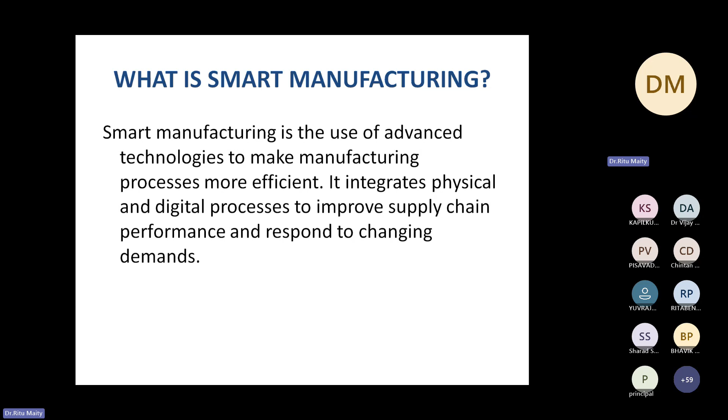So when we look into what smart factories are actually doing and what technologies they are using, AI plays the major role, because artificial intelligence is a technology in which we try to make machines intelligent, and smart factories are the concept in which all the machines are intelligent enough to take decisions by themselves. In smart factories we will have very few human beings; all the machines will be controlled by themselves. So machines are now intelligent, they are able to take decisions.

So obviously for these things to happen, we need technologies like artificial intelligence, machine learning, IoT, cloud computing. All these technologies are coming together to make the smart factory concept work. Previously in manufacturing sectors we focused on subtractive manufacturing processes. We have various machining processes which we are already using, and mostly they were subtractive manufacturing processes.

But in the current era we are seeing additive manufacturing processes, where by adding material layer by layer we are making the product. So various complicated items can be made easily through additive manufacturing. Nowadays in the manufacturing sectors we have the concept of augmented reality and virtual reality, where if an automobile company wants to launch a new model of a car, before launching it they make the model of the car in the software.

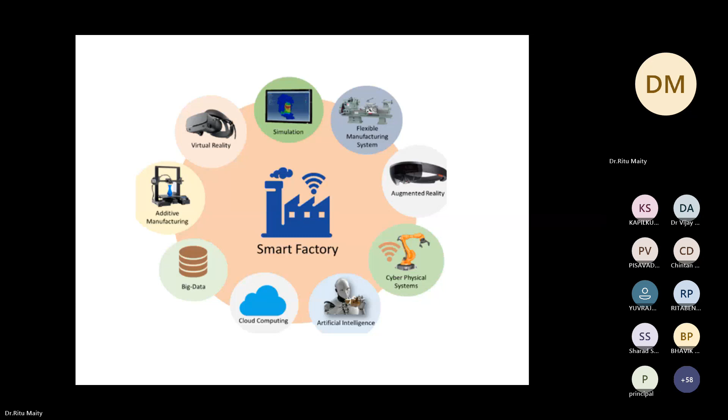So why is smart manufacturing getting a boom in the current era, we can say? It is because it is increasing the businesses like anything. Business can be scalable with the help of the smart manufacturing concept. Mass productions are becoming easier. Customizations are possible, mass customization.

Previously, if someone is looking for a very specific product, like if I say that I need a particular design of car, maybe it won't be possible in the previous system. But now in the current era, people are working on smart industries and smart manufacturing processes, where they are saying that if a person comes for a customized product, a customized car, then also we will be able to manufacture and give it, because the time that was previously taken to make a product has been reduced because of these new technologies that are coming into our industries.

So now, as our topic of discussion is micro machining techniques and how AI and the new technologies are impacting micro machining, I'll be first discussing micro machining, and then we'll move into how AI is affecting micro manufacturing processes.

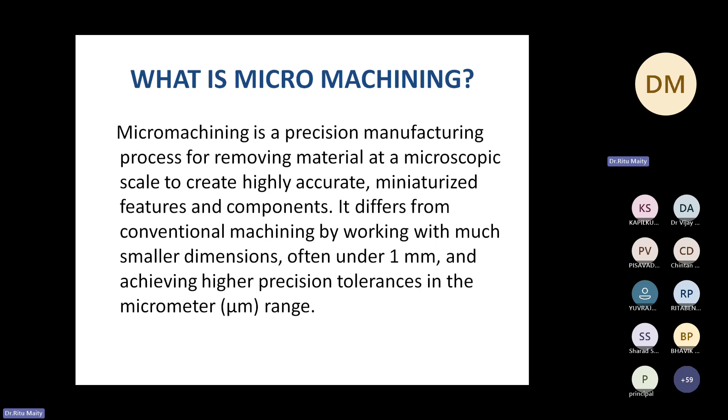So micro machining is basically a precision manufacturing process for removing material at the microscopic level to create highly accurate miniaturized features and components. It differs from conventional machining by working with much smaller dimensions, often under 1 mm, and achieving higher precision tolerances in micrometer ranges. So micro machining is a very critical area where getting the precision is very, very important. So let us see how these technologies are impacting this field.

So if I try to classify micro manufacturing into various domains: under micro manufacturing, we have different MEMS technologies, that is micro electromechanical system technologies, like lithography based methods, photolithography, plating methods, chemical etching methods, LIGA methods, through which we are able to generate micro components which are mostly used for electromechanical parts, and in circuit part design and manufacturing.

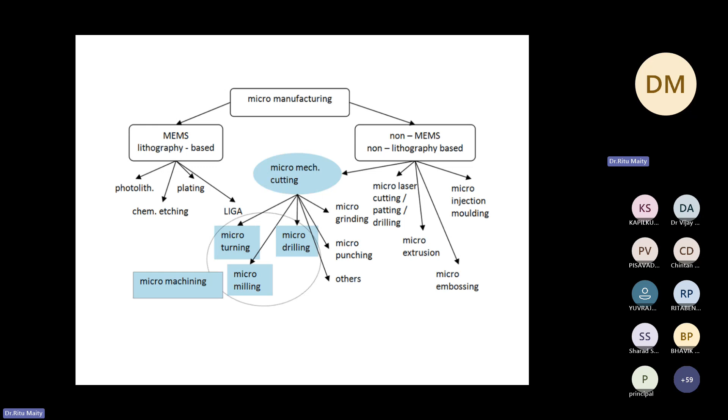And some are the non-MEMS technology processes which come under micro manufacturing, like micro laser cutting, drilling, micro grinding, micro milling and drilling processes, turning processes, micro extrusion processes, embossing processes. So these are the different categories. Now we'll be seeing how AI is impacting this non-MEMS technology area. That is again a huge area where various challenges are faced when we go for micro machining through laser cutting or laser drilling, or through grinding or drilling, and how the accuracies and precisions are being achieved.

So why are we talking about micro machining and nano fabrication, why are they progressing so fast in the industries and becoming a demand of the current era? It is because nowadays we have various complex 3D components, and micro scale features are being produced. Then we are moving more into electronic devices, semiconductor devices. In those electrical components there are miniature parts, so machining of those parts is required through micro machining processes.

Then superior properties of materials are required. Nano and micro level surface finish is required. Microfluidic channels are required in various places to develop various R&D products. And this micro machining area also contributes to healthcare sectors, where we develop various micro stents that are used in surgeries. Those are very small parts which are inserted into human bodies. There also micro machining and nano machining concepts are required, and again, very high precision is required in those domains.

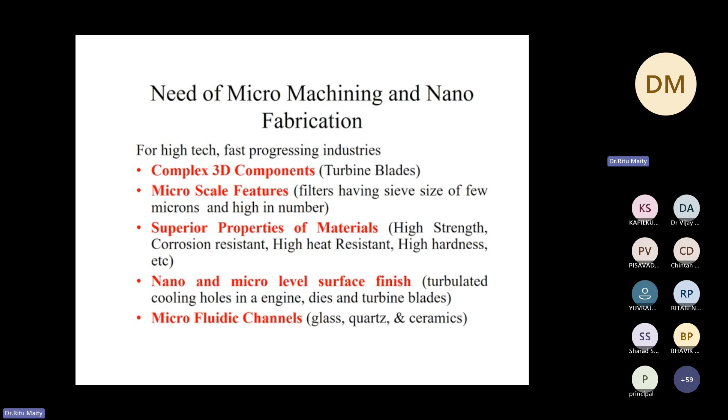If we talk about applications of micro machining, there is creation of high precision surgical equipment. Surgical equipment is the most important area where micro machining is playing a very important role. Micro components are being generated for various robotic surgeries. Then various critical components are inserted into human bodies, which are very small and miniaturized products.

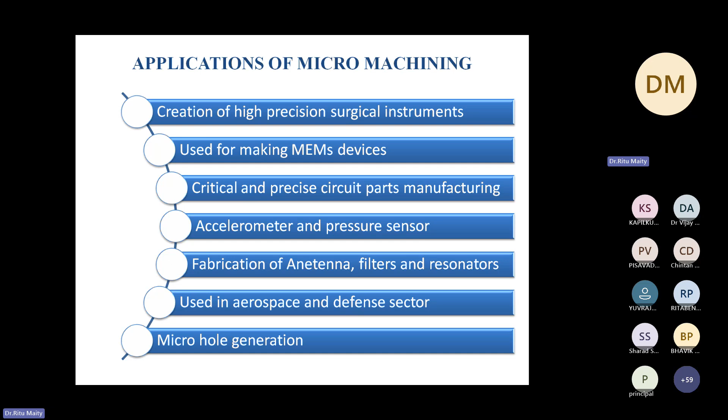And it is used for development of various MEMS devices, critical and precise circuit parts manufacturing, then various sensor parts. There also micro machining and nano machining are required. Accelerometers, pressure sensors, fabrication of antennas, filters, resonators, and in aerospace and defense sectors also micro machining plays a major role.

Coming into micro machining challenges, what are the challenges normally people are facing while micro machining? At our organization we are involved with various aerospace component manufacturing, where we deal with various precise sensor parts manufacturing, as well as various medical equipment manufacturing processes, where we find the major challenge is getting the extreme precision that is desired in the application of that product.

So I can say the sub-micrometer accuracy that is required for critical features we have to achieve, and mostly we have very small dimensions, smaller than a human hair, and that much precision has to be achieved. Achieving that accuracy is a major challenge. And traditional limitations, like tool wear, process variability, quality control challenges, are also major challenges. Quality problems mostly happen in these micro machining processes.

So how can this new technology, these advancements in technologies, help to overcome these challenges? AI solutions can provide us smart and adaptive machining systems that can overcome the conventional manufacturing barriers. Further we'll be discussing how AI can help to overcome these major challenges of micro machining.

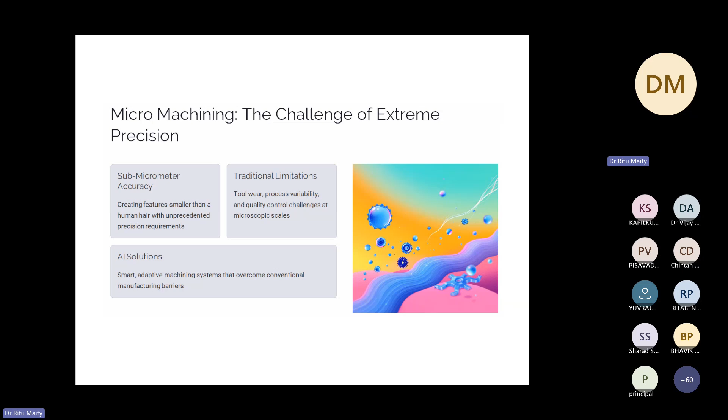So now coming into what is artificial intelligence. Artificial intelligence is basically a capability of a machine to imitate intelligent human behavior. As human beings, we have a brain, so we have the capability to think, act and react. That means we are intelligent because we have a human brain to take decisions. But in a machine, how do we build this capability? How do we make machines learn like human beings? That is done through the technology of artificial intelligence. When we try to build intelligence artificially in machines, that technology is known as artificial intelligence.

Now coming into what this technology is that we are currently talking about. As I told you, AI is a technology in which we try to make machines intelligent, or behave like human beings. So how do we do it? For that, different techniques are there. Artificial intelligence is a broader area in which we want to make systems smart or intelligent. In order to do it, we have different techniques, like machine learning, then deep learning, and currently we are in an era where we have the concept of generative AI and AI tools being used everywhere.

So now, briefly, what is machine learning and deep learning? Machine learning is basically a technology in which we try to make machines learn like human beings, in which we give certain input to the computer, then we give output to the computer, then we leave the computer to learn from the data. Once it learns, when we ask a question, it should be able to tell us the answer. Just like how we teach our students, machine learning works in a similar way.

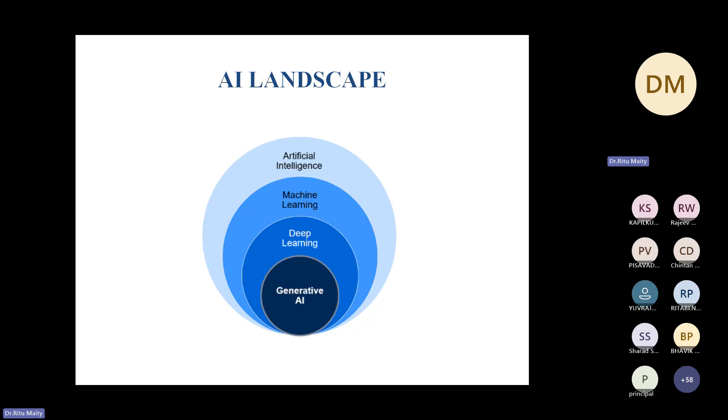And if we talk about industries, there also generative AI tools are getting used, which we'll be seeing further in the examples. So this is all about your AI. AI is a broader area where we have different techniques to implement AI, like machine learning, deep learning, and currently we have generative AI. So now coming into how this AI platform works, when we are talking about industry applications, how AI is getting used in industries.

Suppose I say that I want to do predictive maintenance in industries. Suppose I am having a workshop in which there are hundreds of machines, and we know that in case of maintenance, every 3 months or 4 months, people do preventive maintenance. But nowadays we have a concept of predictive maintenance.

In predictive maintenance, we connect various sensors to our machines, and we try to collect real-time data from the machine, and we monitor how the machine is working. And if any parameter is going up and down, let's say the machine vibration level is increasing, in that case I'll get a notification on my mobile that this machine is having a problem, or whoever is in charge of the department will get a notification that this machine has a problem.

Then he has to take the immediate action so that failure won't happen. So this is how the AI systems are working now. So if I tell you the total workflow of AI: if we want to establish this type of predictive maintenance in our workflows, first of all we need to have data. We need to train the machine on which parameter, if it goes up and down, means the machine needs maintenance.

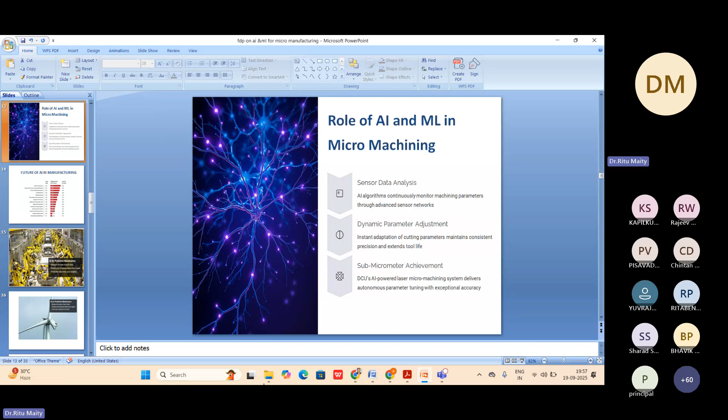Before moving forward into the different AI applications in the micro machining domain, I would like to show you a small video on how our smart factories are working. Then we'll move into more detail on these AI applications in micro machining. So I'll just share a video.

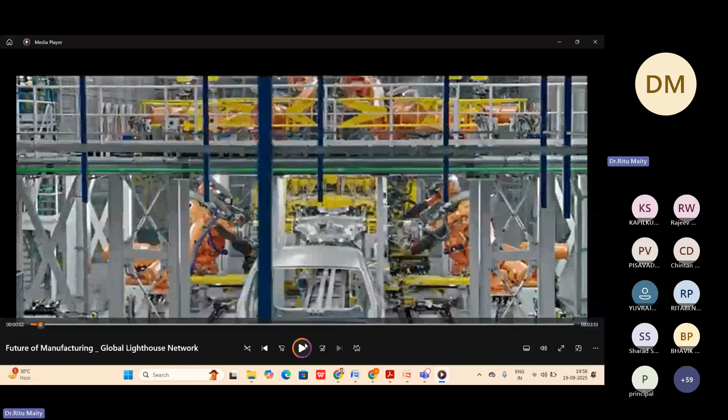Is the video visible? Yes, madam. Okay, sir.

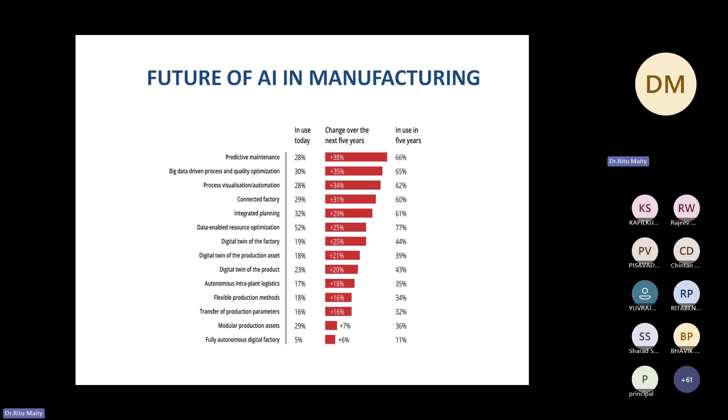Now coming to the future of AI in manufacturing, we can say there is a huge amount of AI in manufacturing sectors, and in the next years it is going to increase drastically. Majority it is used for predictive maintenance first, then for data-driven process management, how to make the processes better, quality optimization, process visualization and automation, where it is getting used widely.

Next is AI for predictive maintenance. As I was saying, mostly in industries now AI is used for predictive maintenance. Before failure we should get a notification that the machine is going to fail. In automobile sectors, the assembly lines are totally automated; everywhere you can see robotic arms doing assembly of the product. Just think that if one of them fails, the total assembly line can stop.

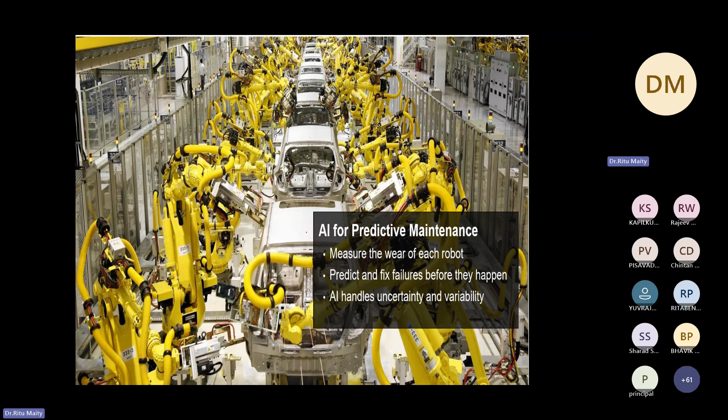So it is important that using AI techniques we track the tool wear. If any robotic arm is failing, before the failure I should get a notification so that I can immediately take action so that none of the robotic arms fail. If one robotic arm fails, the total line production can stop. That is why it is much more important to have this concept of predictive maintenance now. Predictive maintenance can prevent this type of catastrophic failure from happening.

Next is quality inspection. Intelligent quality inspection systems are being used by industries now. Previously people used visual inspection methods, manual methods for checking. Nowadays people are using intelligent cameras which check the quality of the product in a better and more accurate way. Surface roughness and tolerance analysis can also be done using AI techniques.

Zero defect manufacturing through AI vision systems is the main vision of industries now, and it is actually being achieved very accurately because many human errors get eliminated when we use AI-enabled systems. If you are using an intelligent camera, the original design of how my end product should look will be with me, which I'll feed into the computer.

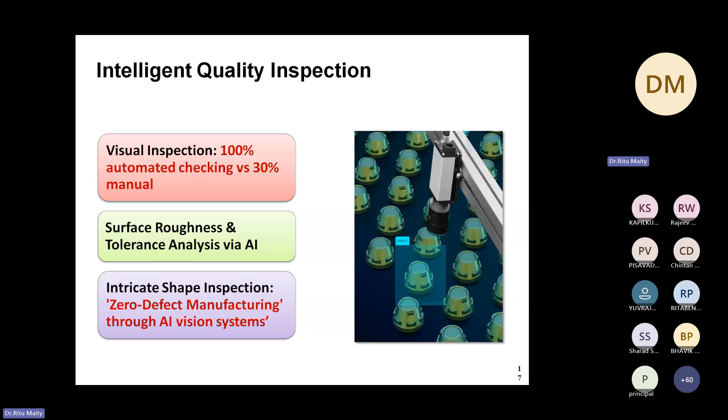Now when the part has been made and brought before that system, the camera will capture a photograph of the product and overlap it with the original drawing to check if there is any defect or not. In that process it eliminates human error and makes the process faster and more accurate.

When we talk about these monitoring systems and quality measurement systems, the manufacturing environment has mostly divided them into two areas, that is monitoring system health and monitoring product health.

When we talk about monitoring system health, it is about the machines, whether the machines are working properly or not, to detect if there is any fault while machining in the machine, or in the cutting tool, if we are using any damaged tool or not.

Real-time monitoring of health indexes, like using sensors taking the signals from the machine: is the machine having some problems where maintenance is required, or has a damaged tool been used, which can also lead to a bad quality product. How the life of the components can be predicted, the tools that we are using, what is the life of the tool, when the tool needs to be replaced. All this monitoring can make our system process better.

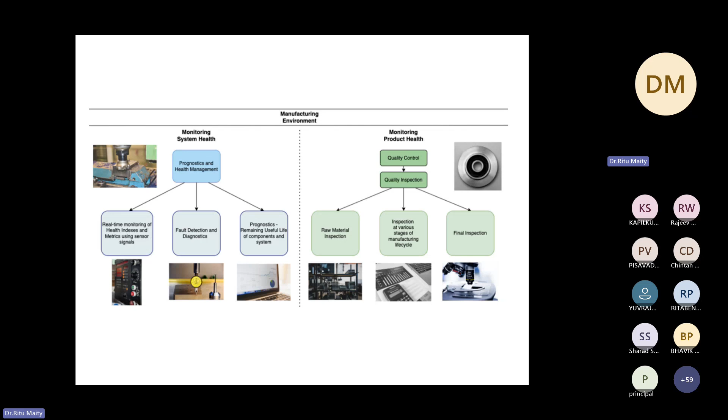Then monitoring product health, so that is basically our quality inspection. Where we are talking about intelligent cameras being used for visual inspection systems, that comes under quality inspection. So inspection is getting done in various stages and various AI-enabled systems are getting used for the inspection process nowadays. Here is an example of a visual inspection system.

As I was talking about, we'll be using an intelligent camera and will previously have the part image, the design, already, and whatever image I'm taking through the camera, I'll overlap both the images to find out if there are any faults or not. So this is how industries are mostly using visual inspection systems currently to detect the defects.

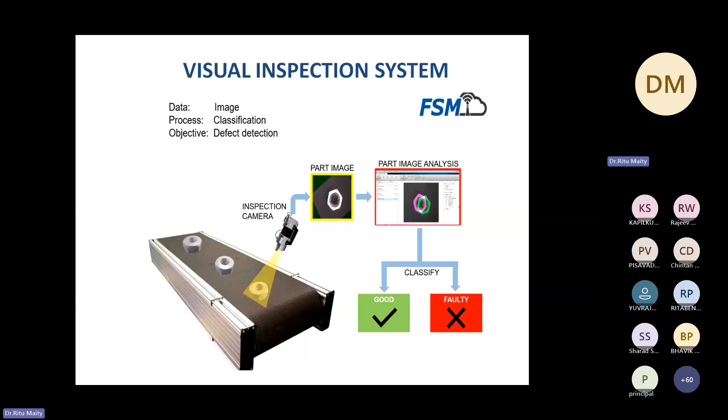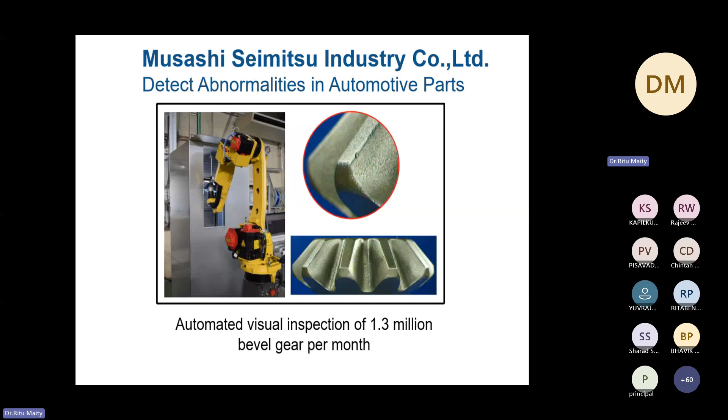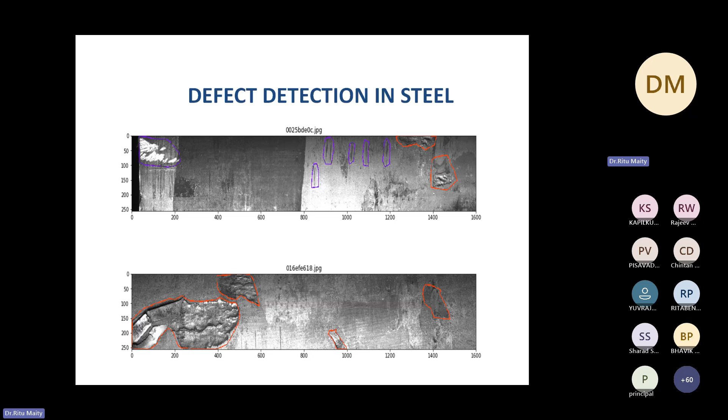So this is a case study by a Japanese company where they have done detection of abnormality in automotive parts. Using this visual inspection system, they could do inspection of around 1.3 million bevel gears per month. Nowadays various steel industries are also using defect detection using this visual inspection system. They are also using an intelligent camera, where the camera, after it studies the steel coil, will be able to identify where the scratches or dent marks are, and it will make the process smoother and more accurate.

Then next is generative designs for smart manufacturing using AI. Nowadays, the design tools that we are already using in industries are using AI technology to make the designs better. Previously, the designers in the industries used to optimize the design. Let's say a product has been made, we need to further make changes to it to optimize it in terms of its weight or mass, volume, or applicability. Based on this, we need to optimize it.

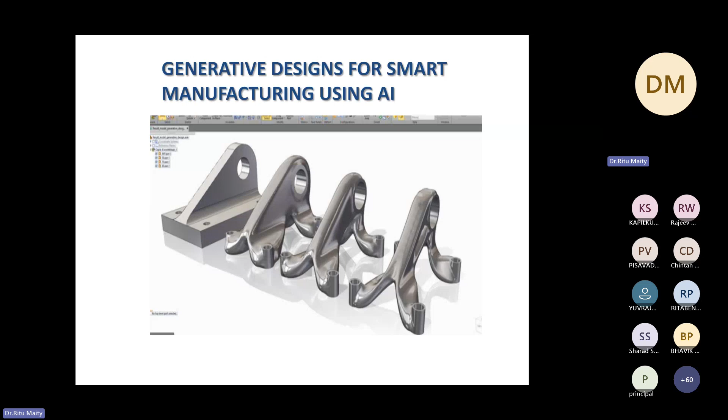So nowadays we have generative design tools available in the software itself, where if we say that I want to optimize this part according to its volume, it will automatically optimize the part. We have various advanced features in the CAD software that we are using in industries, like if we give a 2D drawing, almost the whole 3D drawing will be generated automatically. So various AI tools are getting integrated, which are making the work of the designers faster and easier.

Then there is a concept known as digital twin, which is also getting widely used in industries when we talk about smart industries and the smart factories concept, and it also has applications in the micro manufacturing domain. So we'll see a small video on what a digital twin is.

I hope the video is visible. Yes, madam, video is visible. Okay.

Here we can see a digital twin is basically a virtual representation of a physical device. Whatever physical device we are trying to make, we make an exact replica of it, and we are able to see the real-time results in that. Suppose we have done micro manufacturing of a particular circuit system that we have developed. If you are able to make the virtual replica of it and see exactly how the current and electricity is passing through it, and get real-time results, that is the concept of the digital twin.

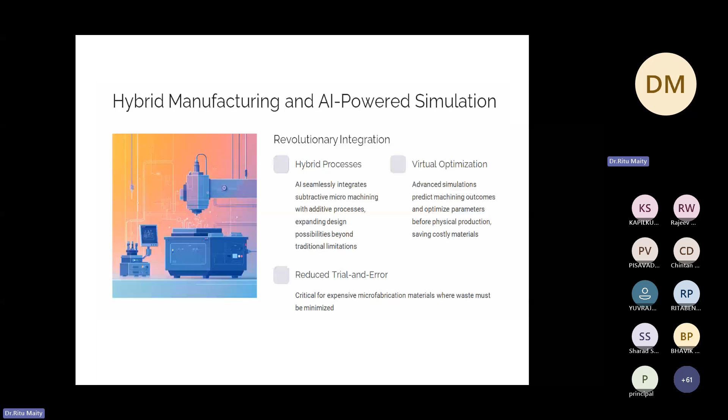So we have reduced trial and error methods now, like for critical, expensive microfabrication material where waste must be minimized. There these hit and trial methods can really lead to a high cost that can be reduced with the help of AI technologies.

Then AI-driven laser micromachining is also creating a breakthrough in the industries, like AI-integrated laser micromachining systems. They are using artificial neural network concepts to autonomously optimize the laser ablation parameters. So laser machining parameters, how to make them better, how optimized machining can be done, are being handled through AI technologies, through the deep learning technologies that we discussed previously.

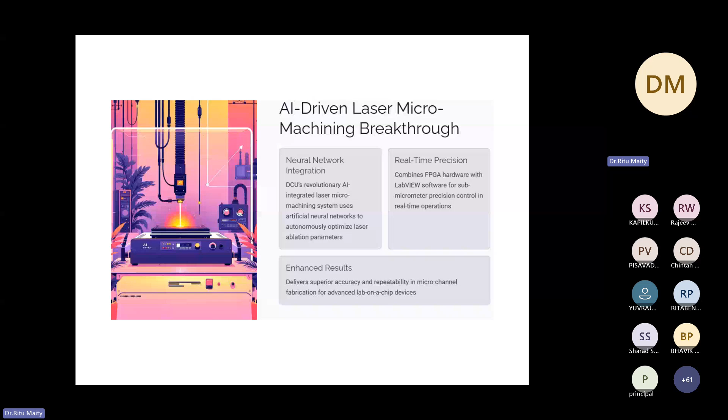Then real-time precision: how we can get better precision. We can see, whenever we are machining, how we can monitor the precision and make it better. So we have that type of system now. Enhanced results: how we can get superior accuracy and repeatability in micro channel fabrication, for advanced lab-on-chip device designs. So these are the areas where AI is helping to grow.

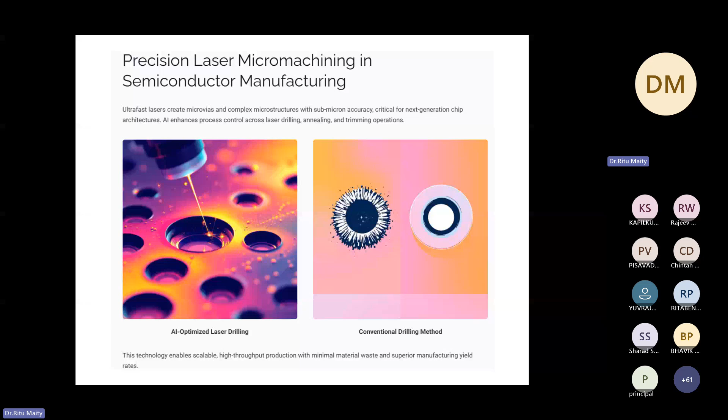So obviously in less time you will be able to get a more accurate product, which people used to do in a manual method. So, AI-enabled dynamic process optimization: through AI, how our process is getting optimized.

Like we have a concept of reinforcement learning, where advanced models dynamically adjust machining parameters to maintain surface integrity despite tool wear. So nowadays AI is helping our machining process to work in a better way. The machining parameters can be controlled in a better way to have better surface finish and less tool wear.

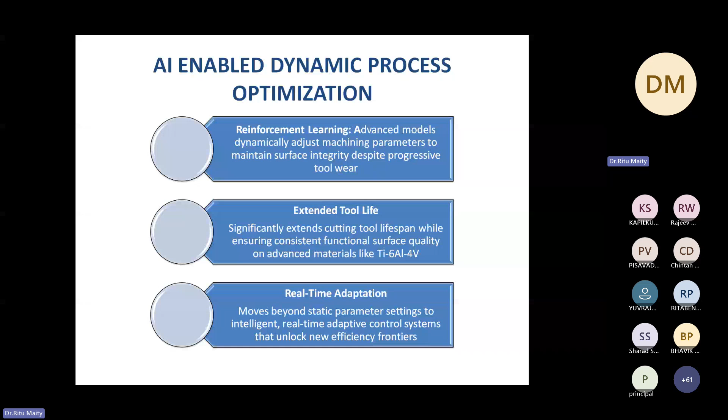Then we have extended tool life. Significantly, it extends the cutting tool lifespan while ensuring consistent functional surface qualities. Then real-time adaptations: how to make the parameter settings better, how real-time adaptive controls can be made. So these are the areas where AI is helping optimize the processes.

Then laser micro milling machining. This is again a very critical area of machining. Ultrafast pulse lasers machine intricate features down to 10 micrometers on ultra-hard materials like tungsten carbide. AI-assisted CAM software can now generate precise tool paths for complex 3D microstructures. So various complicated structures can be machined with the help of AI-assisted software, which can give us better and more precise tool paths and results.

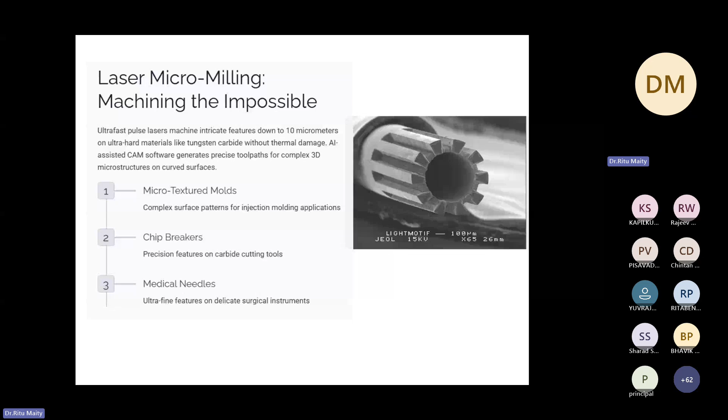Micro-textured molds and complex surface patterns can be achieved. Precision on carbide cutting tools. So very fine and thin structures can be machined. So these were the application areas where AI is playing a great role in helping our processes grow in a better way in the micro machining sector.

Now coming to the benefits of smart manufacturing. It can optimize our resource utilization. It gives us a competitive edge. Cost cutting happens. We get better quality and higher customer satisfaction. Productivity of the plant will increase. We can get better innovative products, and customized products too.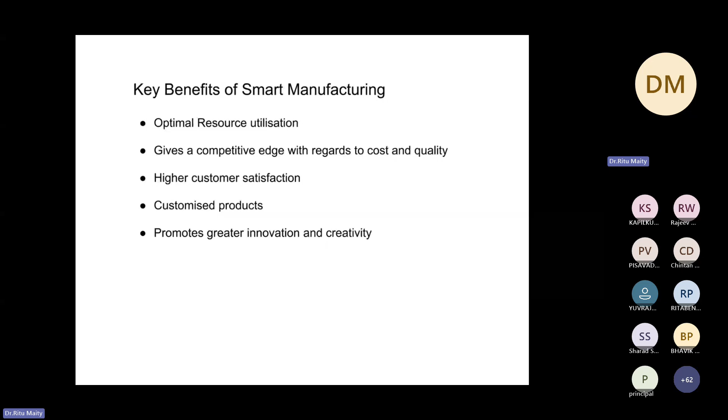Then, if you talk about risks associated with manufacturing, it basically deals with the safety of the data, because when you are making a smart system, everything is connected with the internet. So there are chances of hacking. For that, we have the area of cyber security, where how these things can be controlled is also being taken care of.

Then when we talk about change management, when our systems are changing and our machines are becoming advanced, we need to make our workforce ready for that, which is also creating a challenge. Then adverse social impacts: there can be reduced person-to-person interaction, because nowadays machines are smart and able to interact with each other. One machine can tell another machine what operation has to be done or what next operations have to be conducted. So physical devices are interacting, and this has an impact.

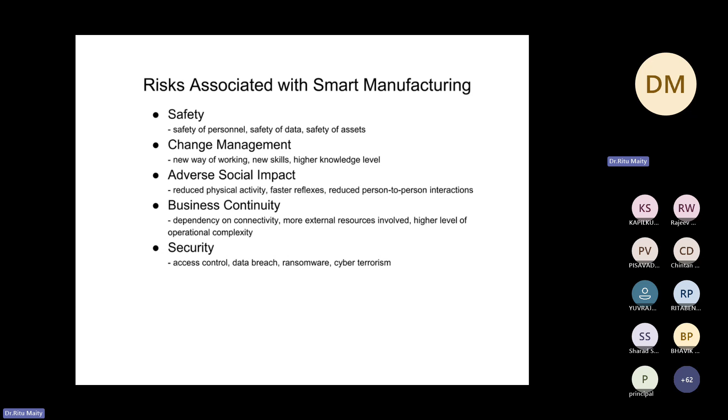Then security is obviously being taken care of by the cyber security domain. Now, if I talk about challenges involved in applying AI for micro manufacturing, the first major challenge is data availability and quality. In order to make an AI model, in order to make a computer intelligent, you always need data. You need data to train the computer on what is the input and output. Once it is trained, when you ask a question, it is able to tell you the answer.

If you are working on optimizing parameters of a laser machine, then you also have to make the computer understand that if these are my setting parameters, my quality of output will be better, otherwise it will be low. For that, data is required. Micro-scale experiments are generally expensive and time consuming, so very little data is available, a sparse amount of labeled data.

So whenever anyone is planning to do defect detection during micro machining processes, getting data becomes a major challenge. Where will I get the data from? Doing those experiments every time becomes very costly, so it is not possible to conduct the experiments every time. To make AI models work better, they need a huge amount of data to be trained with.

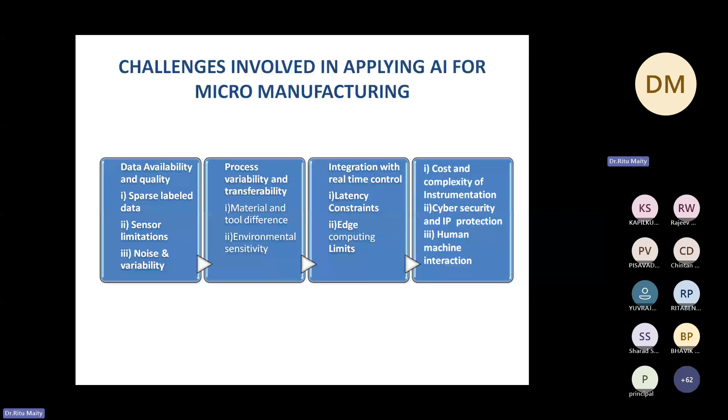Then human machine interaction. Operators may need to override AI recommendations. Sometimes while machining, the operator needs to take a decision instantly, which maybe at that time AI won't be able to take. So that is also a challenge being faced. So these are the areas which need to be further looked into for further development.

Then if we talk about the future of AI in this micro machining domain, there are various areas where further AI research is being done to make micro machining sectors better. First, multi-axis integration: advanced AI integration with multi-axis micro machining systems for complex 3D micro fabrication capabilities. Then dynamic surface control: how AI models can predict surface quality in a better way, and how it can contribute across diverse material types. Continuous production: how AI enabled systems can help in 24/7 production operations with better quality.

Fully autonomous micro machining systems: how it can be done, how the precision and speed can be achieved. So these are the areas where further work is being done in AI.

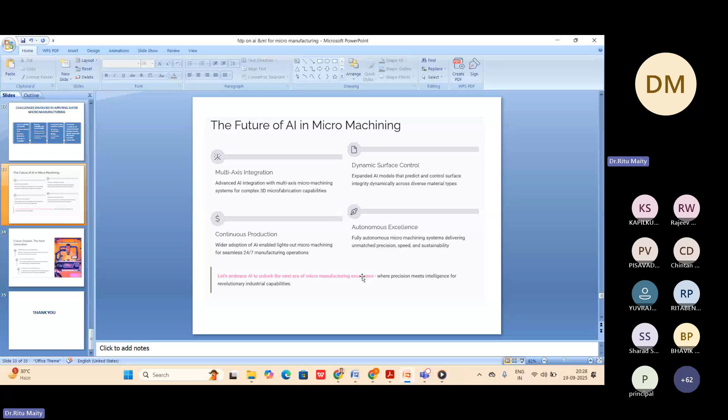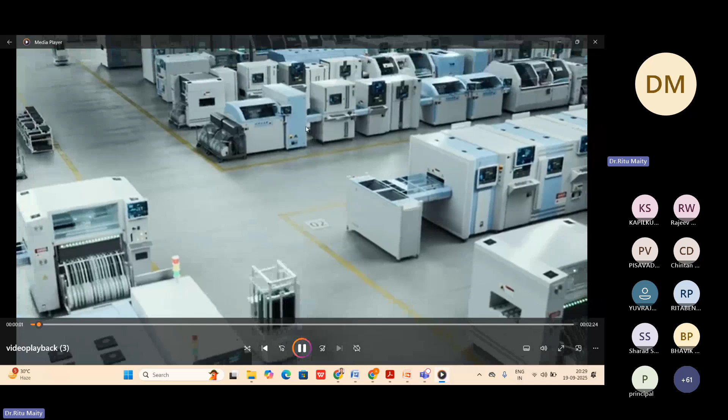And I would like to show you a few AI tools which are currently being used in industries. We can see it through a video. They have shown a few uses of AI tools in this video. So these are the various AI tools for manufacturing industries.

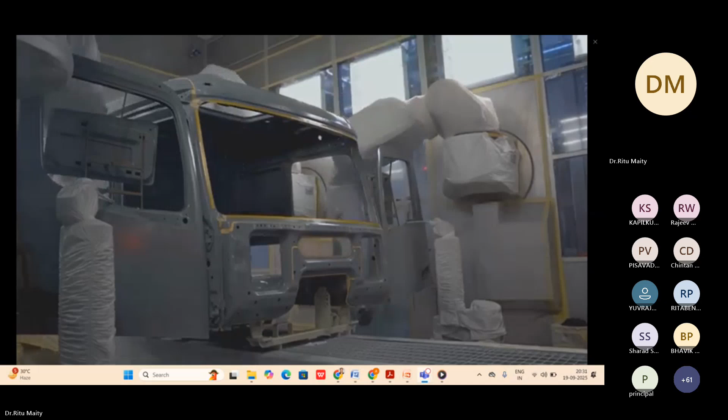So these were some of the applications that are getting used in the industries. Currently a few are licensed things that are getting used in the industries to do their predictive maintenance, to have better quality, to make their quality inspection processes better, to get the precise results they are already using.

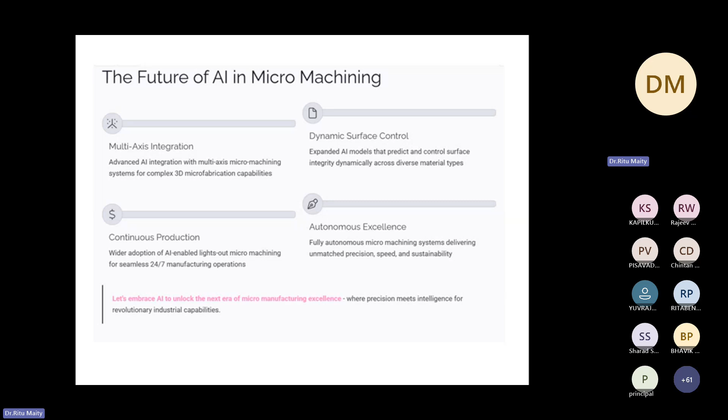And a few more processes are in the development stage, where research is going on into how to have accurate results in micro machining and nano machining, how precision and accuracy can be achieved, where the major challenge in AI becomes capturing high resolution images and doing the predictions. Basically, in this miniature domain it becomes a major challenge.

So coming to the future outlook and next generation, there are fully autonomous work systems which the future will have, that is, complete AI integration enabling self-operating micro machining systems with minimal human oversight. So we can say that in future we'll have fully autonomous workstations, democratized expertise, and user-friendly AI interfaces made with advancement in manufacturing and micro machining, in how AI will be used further.

For that, user-friendly interfaces will be developed, continuous learning systems will be developed so that we can have more precision, efficiency, accuracy, and customization. So this is how AI is helping the manufacturing sector to grow, and further research is being conducted in these areas to make the systems better.